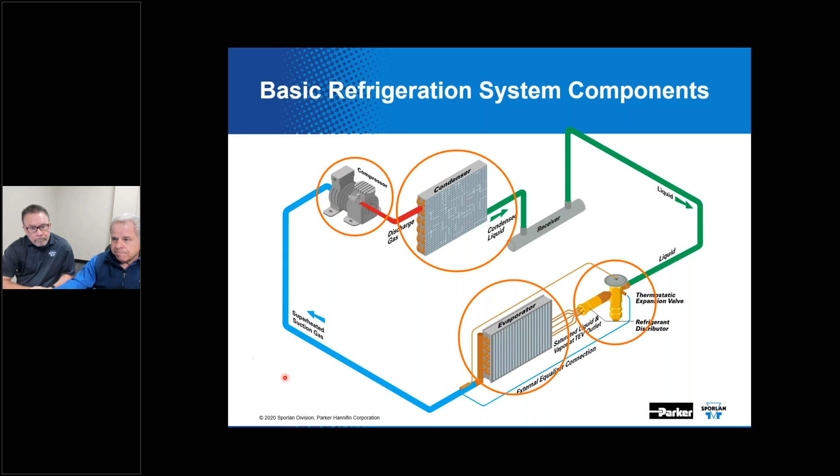And then, of course, here we have the evaporator as that 4th component I was talking about, where we are absorbing heat, transferring heat from a space that we're trying to cool or refrigerate. 4 main components. Now, here's a more complicated image.

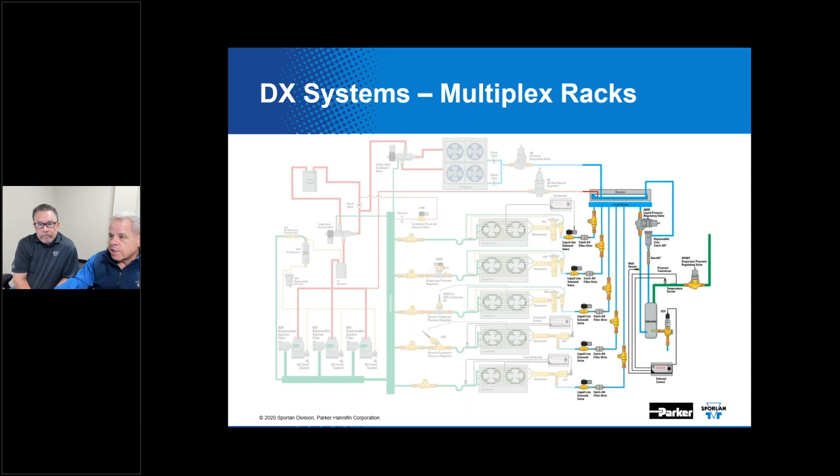Even with all that, this particular image is quite reduced from what you might encounter in an actual supermarket environment. But today, we're mostly going to talk about, or at least we're going to start conversation here on the high side with the liquid side components. If down the road, Don asked us back, there are other devices that we can emphasize with some of these same techniques. We can talk about mechanical subcoolers, we can talk about liquid pressure regulators and solenoid valves on the liquid line applications, as well as filter-driers.

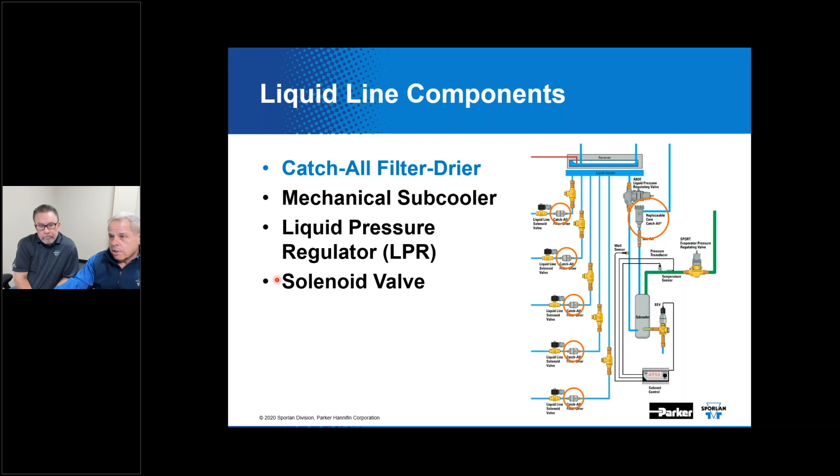Oh yes, many times. Now, our filter-drier is purpose-built, or any good filter-drier is purpose-built to remove contamination from the refrigeration system and protect system components. Anything in a system besides refrigerant and lubricant, sometimes referred to as oil, is considered a contaminant. The Catch-All filter-drier is designed to remove these major contaminants, which consist of moisture, acid, sludge, varnish, and even waxy substances as well.

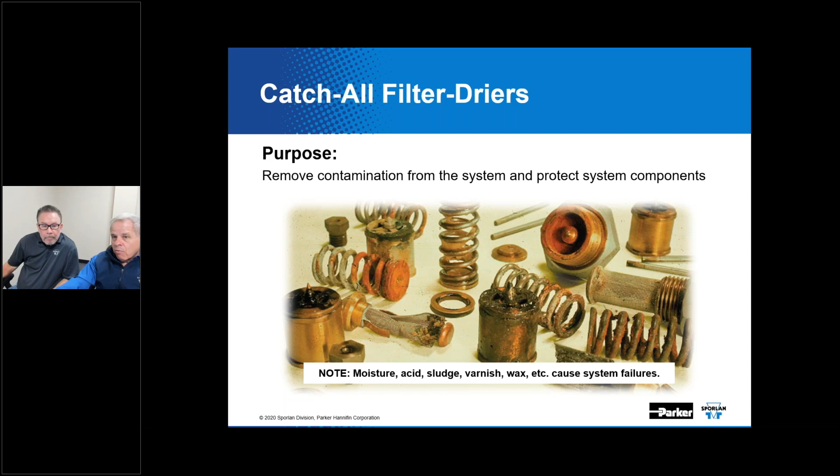As you can see on this slide, we're talking about material you don't want in the system. Contamination is anything that is any unwanted material in any unwanted location. Contamination is one of the single biggest culprits on compromising the operation of the system with respect to reliability, capacity, and efficiency. It's one of the single biggest things that causes the system to malfunction.

To use some of Don's words that I've heard him say in the past, you want the system to be clean, dry, and tight. We want it to be clean and free of any contamination. We want it to be free of moisture, which is also a contaminant, and we want it to be leak tight, leak free. Contamination can be introduced from a number of things.

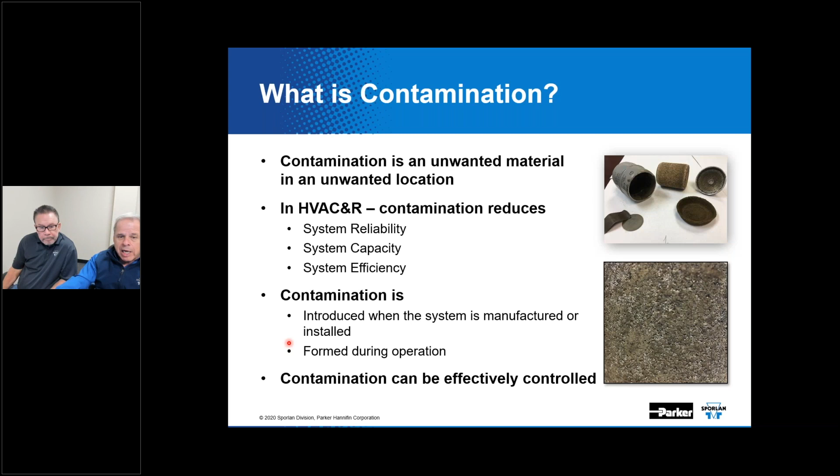For instance, it can be introduced when the system is manufactured, and I don't want to point fingers at anybody, but sometimes that can happen. It can also be introduced while a system is constructed in the field. It can be formed during operation, when things go awry during normal or abnormal operation, contamination can be generated. But there's good news on all of this - there's ways to control it and corral it and alleviate the problems that it can cause.

With the common use of POE lubricants, this is certainly a potential issue due to the hygroscopic nature. It's so water hungry, right, Kevin? It's the POE has an affinity for moisture, so to speak.

Absolutely, Jim. Now, as I recall, and you might know more about this than I do, but alcohols and acids are actually processed to form POE lubricant, and there's a byproduct when that takes place, and it's actually water. So does it make sense that you could reverse that operation? If you had POE lubricant circulating through the system and you had an unreasonable amount of moisture entrapped, you could revert back to alcohols and acids being present in the system. Does that make sense? That would be absolutely correct, Jim.

Now, foreign matter originates from a variety of sources, like we said earlier: oxide, scale, metallic fines, fibers, and the list just goes on. This stuff can be introduced into the system during assembly, during construction, or service. Keep in mind, some of these lubricants, like POE, do a really good job of suspending and transporting large amounts of debris if it's in the system.

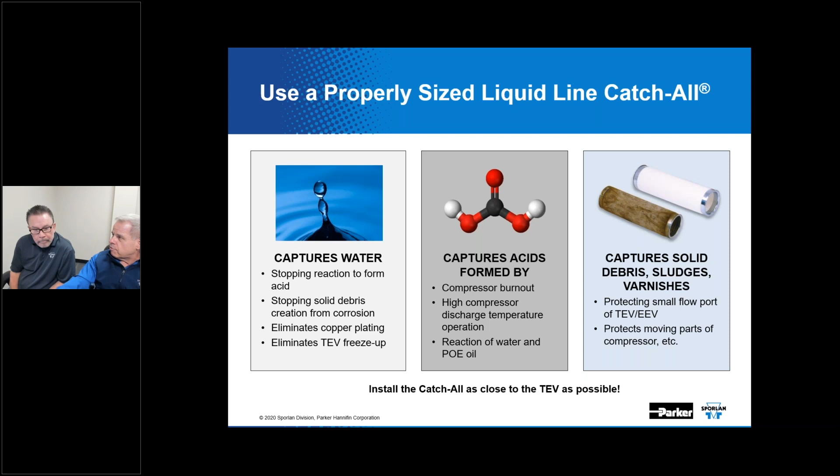POE is also a reasonably good solvent and has a scouring action, and if there is stuff that's plated out, it could possibly break that loose. Then you might have sludge and varnish as byproducts of lubricant decomposition along the way. Even waxy substances can originate if you've got a low temp system. We still see that on occasion, maybe not as often as what you used to have in the era of CFC refrigerants, but still does take place, if I'm not mistaken.

Before I go on here, Don originally said we had a question or two. One question is, what is the temperature at which the paint on a filter dryer will melt or burn? Okay, that's an interesting question. I can guarantee this: if you put a torch to it out in the field, you're going to burn it and deteriorate it. That's a tough one.

That usually comes up because you've got a filter dryer that is being sweat into the system. Oftentimes, a lot of times people will want to install that out at the condensing unit, right? That's where you see them a lot of times, Kevin. We'd rather see that filter dryer right there at the inlet of the evaporator where the expansion device is located, so that you got good protection for it there.

I don't know the exact point at which that epoxy powder coat starts to deteriorate due to heat, but I know it is certainly compromised by the heat from a flame on a torch. So maybe all the more reason to be mindful of that when you're brazing it into the system.

We've always recommended that you definitely direct your torch flame away from the shell itself, and it's always a good idea to have it wet-ragged or have some kind of thermal protection to prevent burning that paint. That's a good question.

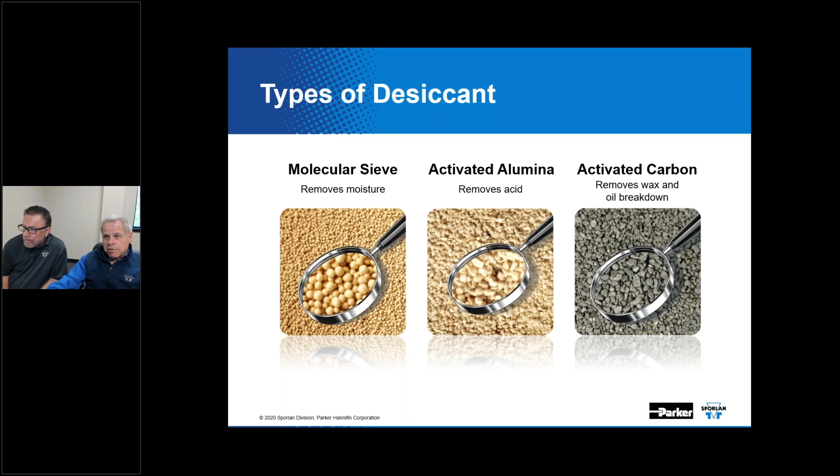Since it's kind of tough to ever predict what kind of contamination might actually be in the system, and depending upon what type of operational issues you've encountered, a molded core with a blend of these desiccants would be an interesting way to approach solving that problem.

Well good. The adsorption of moisture by molecular sieve is actually a molecular phenomenon, and it does not affect the flow capacity through the core around the molecular sieve granules.

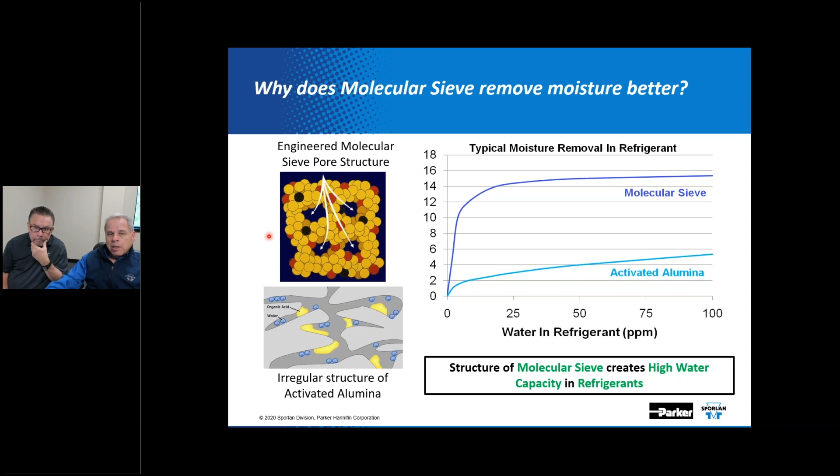Now, if you're pulling a vacuum on an existing system that's been wet, and you suspect the molecular sieve in the filter dryer has done its job, that makes the argument for you to do as good as you can at that point. But we've got a list of reasons why you would replace the filter dryer. Anytime you've gone into a system and done any kind of service, we suggest you replace and renew that filter dryer. I know that's sort of a left-handed answer to the question.

But let's take a look at some more stuff with respect to this. Now, if you consider excessive amounts of moisture in the system, like if you've got a chiller barrel that's ruptured and you have a system full of water, you might see water in the range of getting close to 100%. You've flooded the system with actual liquid water.

From the molecular aspect of how molecular sieve functions, if it traps contamination, you've got to go through a lot of processes to drive that out of the core itself. And I'm thinking the better way to look at that: if you have reason to believe you still have acids in the system, still have moisture in the system, and you've done all the things you know to do, it's time to renew the filter dryer's capabilities and replace it, then continue on with the process you're doing to try to clean it up.

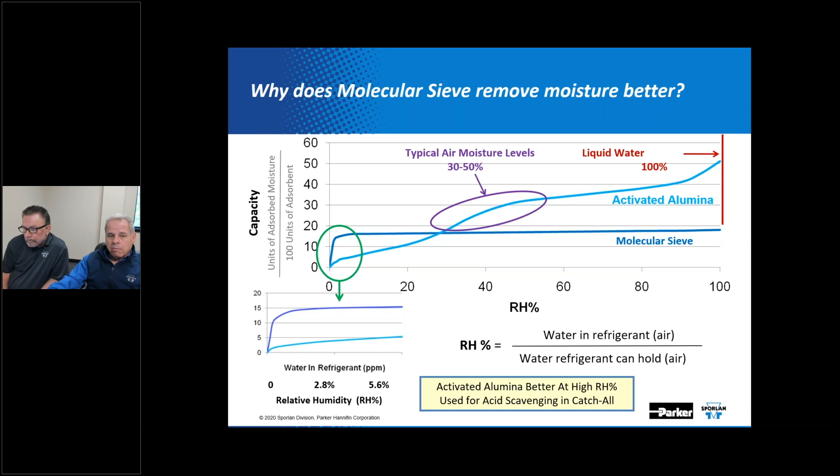Now, filter dryer construction varies by manufacturer and even within the product lines of any given manufacturer. In fact, Sporlan has made solid core filter dryers for years. We've also made loose filled or compacted bead dryers as well. Over time, there's always been a thought that a loose filled version can experience some desiccant attrition. In other words, these beads could vibrate and abrade one another, and due to that process, you might actually have small particles of the desiccant released into the system. That's certainly always been a concern with filter dryers of this design.

The argument can go the other way too. They can say, well, if you've got a molded core and it's abused or roughed up, it could break, and then you've compromised the abilities of that as well. And that certainly is a possibility.

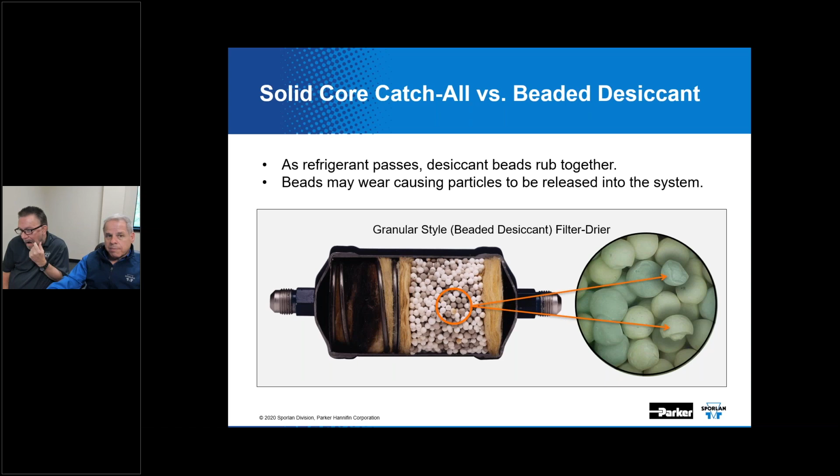We've offered a low-cost, spring-loaded, granular-style filter dryer in the past that was loose-filled or a compacted bead. We've started phasing that out of the process, right, Kevin? Is that no longer in the lineup currently? Correct, yes. And where were those typically used, Kevin? Those were sold mostly for? Primarily OEMs. It was a lower cost option. For like R22 air conditioning, for instance, that sort of thing? Correct, yes.

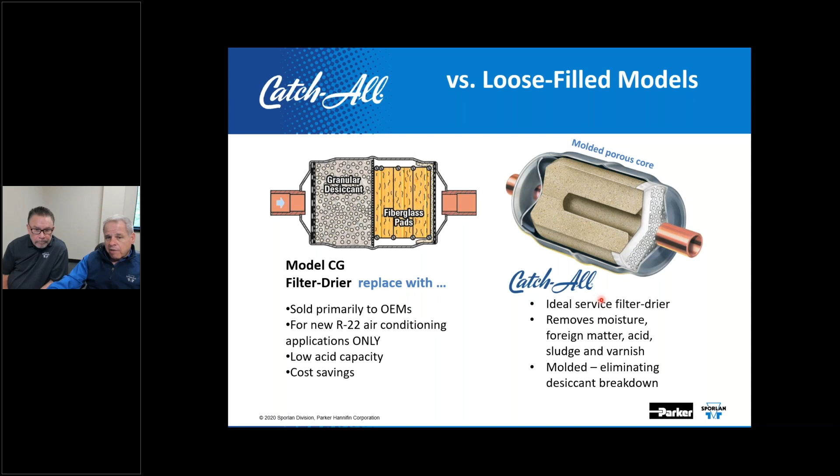But it was mostly a low acid capacity, primarily targeting moisture affinity and tending to entrap moisture. Due to that low acid capacity, we would have never suggested this for servicing equipment in the field. We would have said a better way to approach that would be with a blended solid core like you'd see in a catch-all, which would target the many contaminants that exist in a refrigeration system, and we could eliminate the possibility of any desiccant breakdown or attrition in the process.

This optional secondary filter is a good addition to the system in conjunction with things like POE lubricants. POE lubricant can exhibit a little bit of a scouring tendency, so if it's an existing system that's been retrofitted, you can experience times where that might actually break some of the plated contamination that's been existing in the system for a long time. The secondary filter really helps to clean up afterwards.

Like the sealed models, the replaceable core catch-all can filter down to 40 microns, and the addition of this optional secondary filter can take that all the way down to 20 microns. So it's as effective as most any other device you're going to encounter.

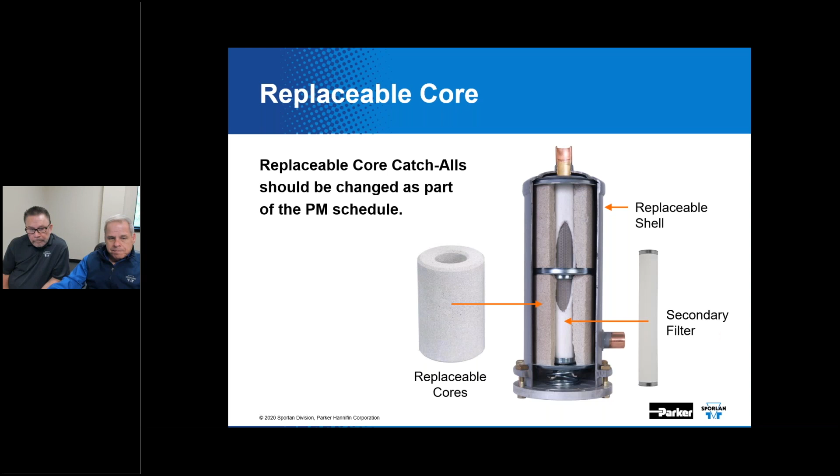The replaceable core type catch-all filter dryer had been manufactured with some different internal components over the years. In the late 90s, it was significantly redesigned, and the internal assemblies of our size C-480 through the C-1920 series shells incorporate a center strainer screen tube construction as the final filter, as you see right here.

The current shell is designed to be used in liquid line applications with replaceable molded cores. An optional secondary filter is still available, and it's recommended at startup and for cleanup in the aid of filtering out undesirable small solid contaminants. You have to be careful when you use that with molded cores only.

The replaceable core type catch-all filter dryer provides a nominal filtration ability down to that 40 micron size at a decent efficiency, I think it's like 50%. When you add that optional secondary filter, of course, we can filter down to 20 microns.

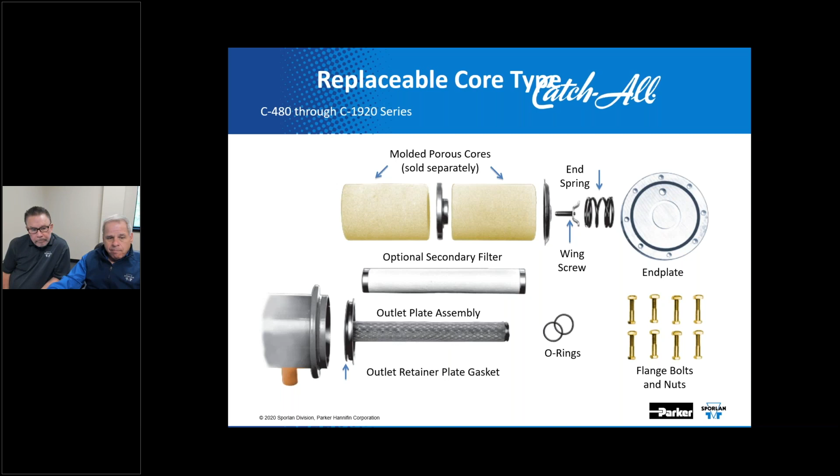Now, as we move into considerations for cleanup outside of the high side, which a lot of these products are intended primarily for liquid line applications or high side application, I guess the general consideration is that you do your best job of collecting moisture out of the system at higher temperatures from liquid. And that's been part of the argument for using liquid line filter dryers for years.

But for certain cleanup applications, it makes sense to have suction devices being addressed as well. We've got a number of replaceable shell catch-alls. While they're primarily intended for liquid line applications, those with the center tube construction are designated appropriately, and that center tube construction allows easy installation of cores and the availability to use that optional fine filter.

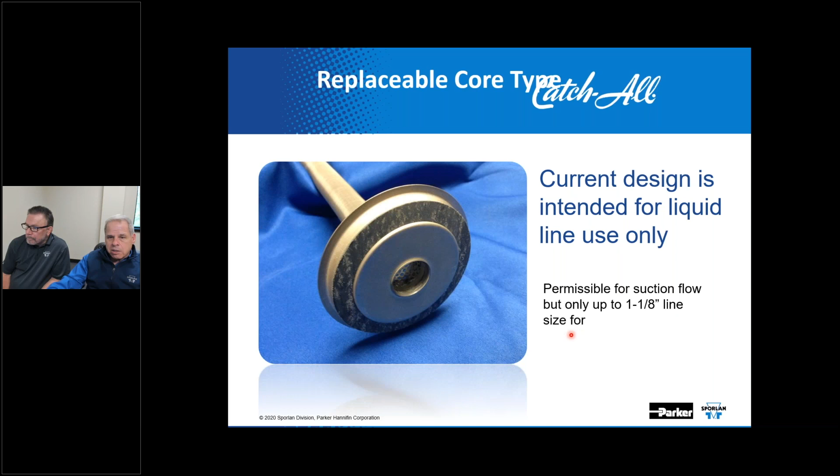And you've got an outlet retainer plate design, which would be possibly too restrictive for suction flow applications, but you could use it there as long as the line sizes are of the appropriate size. As it says here, permissible for suction flow, but only up to 1-1/8 line size. That's something to keep in mind.

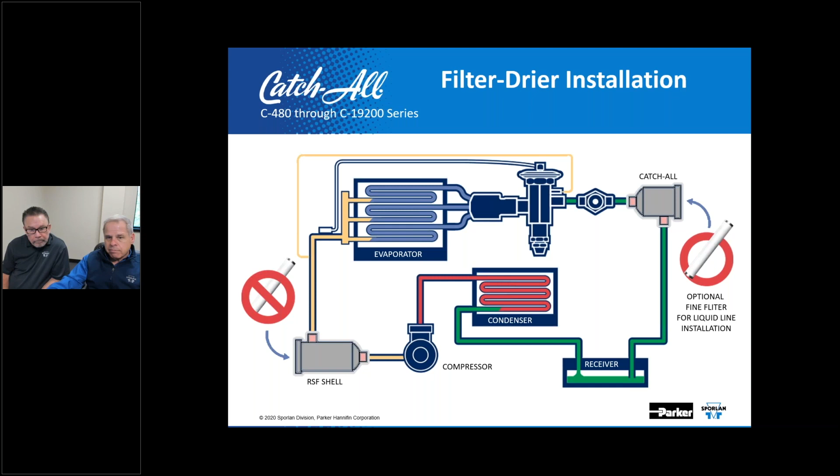Now, this is again more emphasis for that clean, dry, and tight mantra that Don's promoted in the past. We do cleanup of large systems well to ensure that we protect things like thermostatic expansion valves and electronically actuated valves.

The TEV and the EEV are excellent secondary filters, strainers if you will. If you have a debris-laden system, they're going to help you clean it up. But then what's going to happen is you're going to have devices that are full of junk and debris, and you're going to have to replace those. That secondary filter can capture small particles that the core can't, and cleanup is complete when you have that clean, dry, and tight condition achieved.

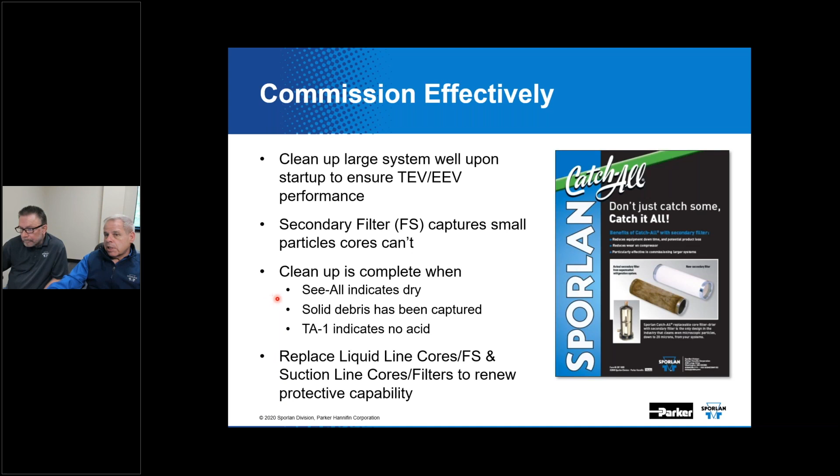You see a number of different images here for our contamination devices and some coloration differences. That ultimately comes from the clay and other elements that are actually present in the materials that are mined to create these different styles of cores.

A good practice would be, if you're cleaning up after burnout, to have a suction line device with the HH core, and then of course our RCA in the liquid line side.

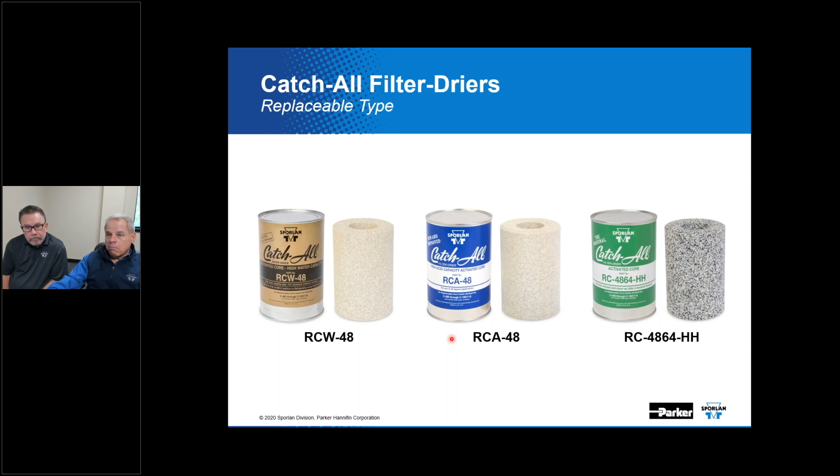Waxy substances can also plague low temp R22 systems. Here's an argument that shows a thermostatic expansion valve, which we have depicted here, can actually help filter out some of this debris in the system, which is not what you want to have happen. Wax can fall out of solution at the pin and port during expansion, where there is a great big pressure drop and a huge change in temperature, which can help precipitate debris that might be in the system.

Waxy substances can travel in solution with refrigerant and oil, and wax is generally not realized until the refrigerant experiences a big pressure drop during the expansion process, causing the substance to precipitate out of solution and collect at the pin and the port.

Kevin, what would be a possible source for that wax in the first place? How does wax get in the system? The source of wax could be residual process fluids such as paste flux, drawing oil, remnants from the manufacturing process, and the deterioration of the lubricant used in the system.

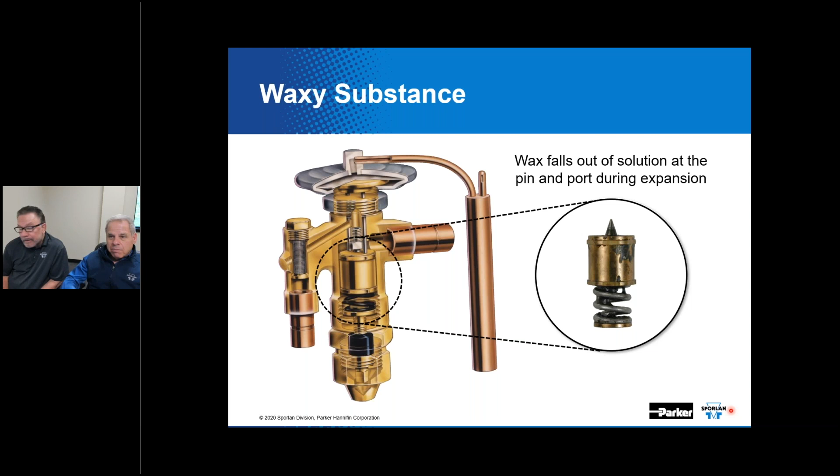Mineral oil contains some amount of paraffin wax, and we still see some mineral oil in systems, right? That's not going away just yet altogether. Not completely, yes, it's still there, so you count on the TEV to be the best secondary strainer in the system, and it will collect contaminants if you don't do something else about it. All the more reason to take good measures to clean up the system.

Systems that run high condensing pressures and temperatures are likely to generate oil breakdown. What do we mean by oil breakdown? Well, the higher temperatures cause the lubricant to fail, basically. It no longer has the lubricant properties, and it can cause problems. Oil breakdown tends to collect at the TEV on the pin and the port and affect the operation of the valve.

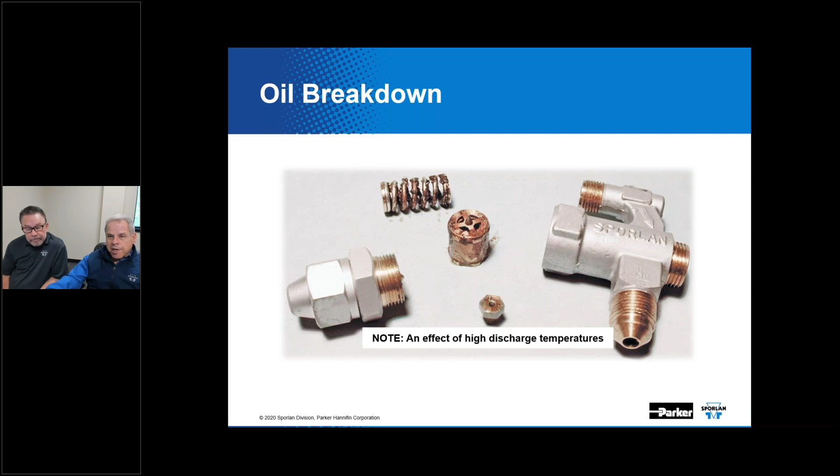I think there's a ten dollar word for that, that some of our product managers in the past would call polymerization.

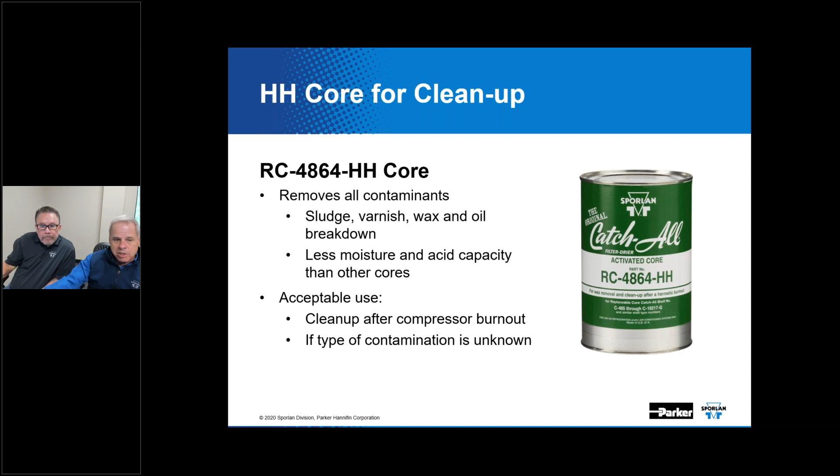One of the things we mentioned before is the presence of acid in the system, and it's, well, how do you know if you have acid or not? One way to take a look at that is if you can access an oil sample. We have acid test kits available to do an on-the-spot quantitative test.

When the acid level is high, you really need to address that. Good recommended practice is to change that filter dryer and monitor the acid level until it gets to an acceptable or non-existent level. You'll need to replace that filter dryer to replenish the contaminant holding capacity.

We'll sometimes receive complaints about a filter dryer having excessive pressure drop across it after it's been installed in a system. What would excessive pressure drop across a filter dryer indicate to you, Kevin? That it's working—it's actually collecting contaminants that are in the system, and that's what you want it to do if they're present. It's done its job.

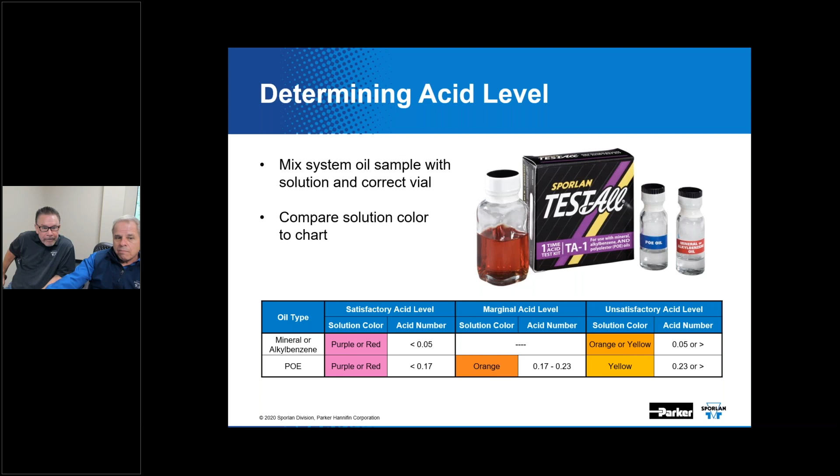Green indicates a dry environment. As it changes color to chartreuse, you can see we're at a cautionary level. If it goes to full yellow, well, then it's wet. It's reversible, provided it doesn't get drenched with moisture—it'll go back to green in time. If it remains yellow, it's probably time to do some service on that system and replace the filter dryer.

Prior to installation, if you pull one of these out of the box at a wholesaler, it's likely to exhibit a chartreuse or even a yellow color, depending on the humidity level in the building—that's just due to exposure. Once it's installed in the system and a deep vacuum is pulled, the moisture indicator should change back to green, unless there's still water or moisture in the system. It will change color to indicate system moisture level once the system has had some good runtime and things have reached a good steady state.

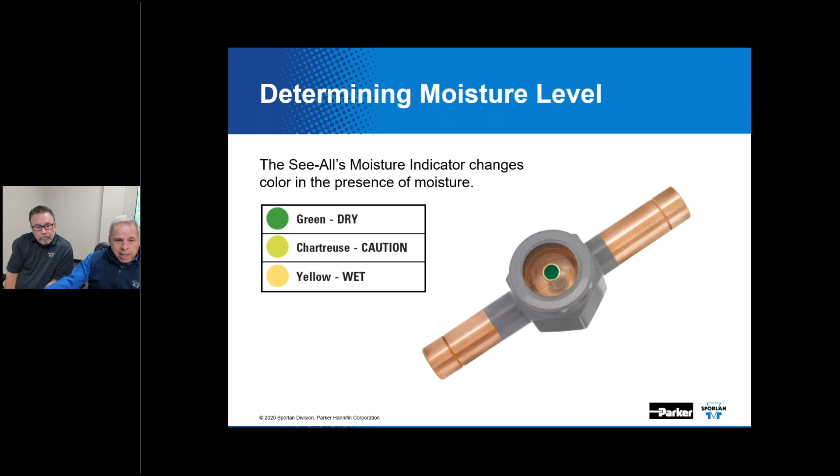Another feature of this device is its ability to give you a snapshot as a sight glass. For instance, if it's placed here, at the inlet of a thermostatic expansion valve, you can see if there's a full column of liquid entering that device.

So it serves those purposes, and in many ways it's a very simple device to select. It's a line-size type of device, and it's usually just a matter of matching up to the line size and selecting what type of fitting combination you'd like, be it flare or sweat. There are many combinations of this, a whole host and plethora of versions, like we see here. Kevin, what's special about what we see here?

It's serviceable. Correct—you've got the indicator that, if you needed to remove it from the bottom side of the sight glass, you can do that, and we do sell that. We sell a kit for that, to rebuild it. Yes, we do offer a kit for that.

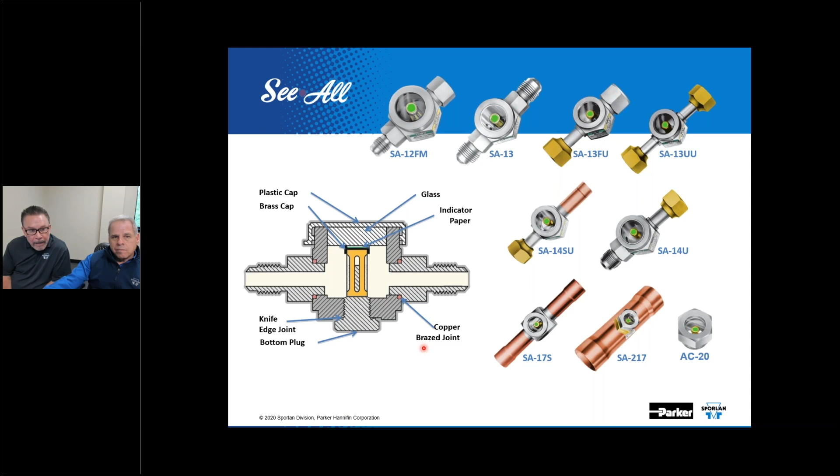Whether it's a problem where the salts have been washed out, or in this case you wouldn't with flare connections, but sometimes on the ODF solder sweat ones, we see them get burnt during installation. And in fact, going back here...

Green, it's dry; chartreuse, it's cautionary; yellow, it's wet. If it happens to be brown, it might be contaminated with debris. If it's black, it's likely been overheated. If it's showing no color at all, there's probably enough moisture in the system that it's washed the salts off this paper—and that can happen. Yes, it'll wash it out to basically appear totally white.

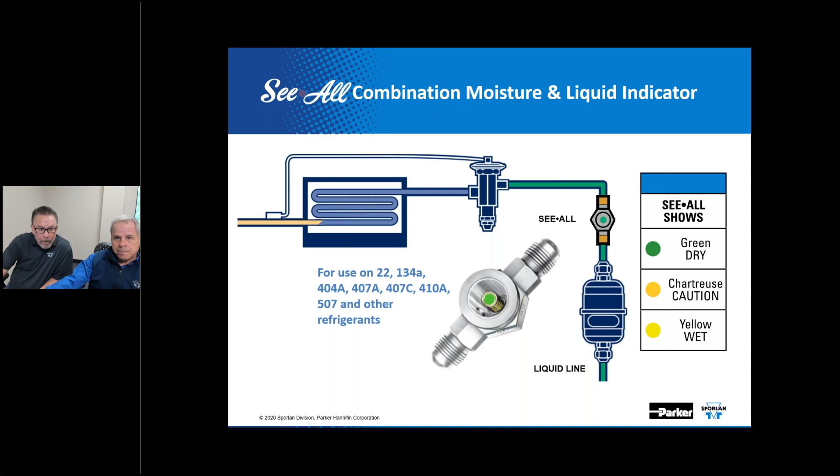As is the case for catch-alls in general, we also make suction filters in sealed and replaceable element models. As its name implies, you'd use a suction filter and install it in the suction line, and it would be for filtering operation only. It's a good device to help protect the compressor.

These have no moisture or acid removing capability and serve only to protect the moving parts in the compressor from fine pieces of dirt, chips, filings, and other particulate contaminants.

A number of the sealed models are furnished as standard with something known as a bypass relief feature. Kevin, what's the purpose of that bypass relief feature? The purpose is to avoid excessive pressure drop in the suction line. This would occur if the filter collected enough dirt to restrict the flow sufficiently. Excessive suction line pressure drop could potentially damage the compressor.

That's an important feature, as it offers protection to the compressor from operating with insufficient cooling at unusually low pressures. That suction filter won't release dirt that it's collected when operating back, if it's in bypass mode. Now there are some people who say, well, you're not doing any filtering if you're in bypass mode, and you've got a point there. You've got to decide what makes more sense for the system you've designed. You want that bypass feature involved—even with the flow directions the refrigerant has to undertake, there's some ability for debris to be knocked out due to flow changes, but you don't have the full effect of the filter. Or you shut it, let it plug off altogether.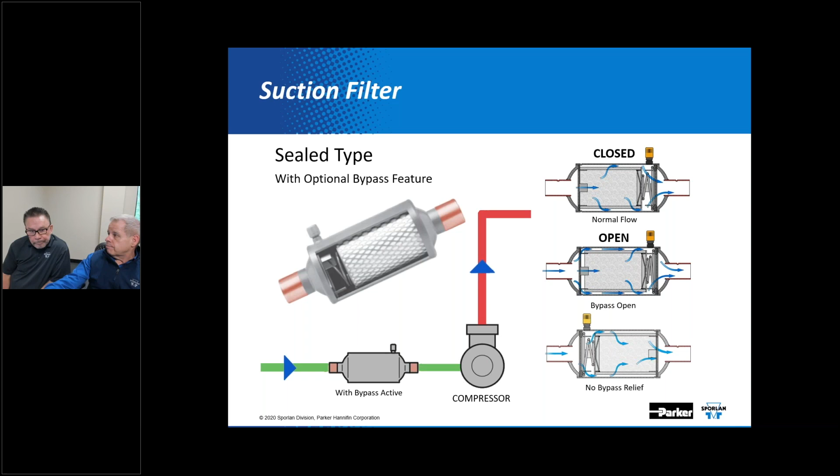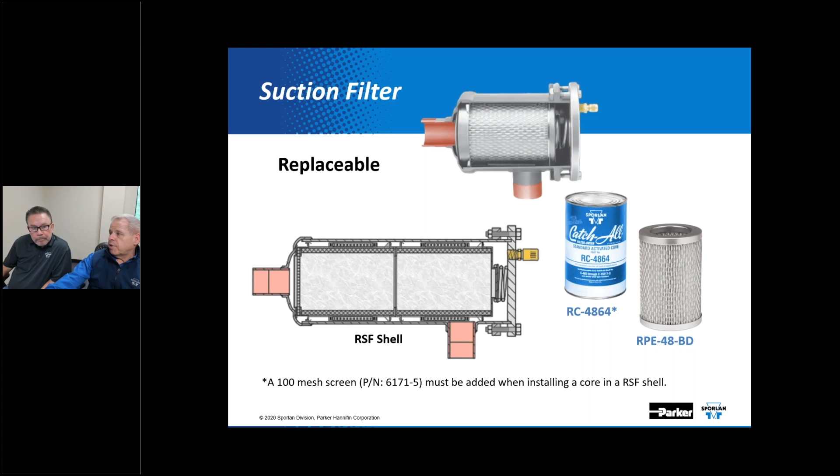The shell for the replaceable element model is nearly identical in construction to the shells of replaceable core catch-alls. The most noticeable difference is the size of the connections for a given shell size. Catch-all cores and pleated filter elements can be used interchangeably, which makes its use really pretty convenient for large system cleanup. After cleanup is completed, using catch-all cores during the cleanup process, the cores could be replaced with pleated filter elements on a permanent basis to reduce suction line pressure drop, because the filter-drier version is going to have a higher pressure drop than just the filter element would have in that similar kind of application.

It should be noted that when using pleated filter elements, the replaceable suction filter is bidirectional, meaning this is a device that can be piped to flow in either direction, but not both. However, if cores are used for cleanup rather than a pleated filter element, the side connection for that shell must be the inlet. It just functions a whole lot better if you take that approach.

When the replaceable element suction filter body is installed using catch-all cores for cleanup, an additional final filter screen should be installed as a precautionary measure. That's one of those things—if you were to install a sealed model catch-all in reverse, you would not have that additional screen in the right spot. I'll have a slide here in a minute that'll show that. Additionally, the pressure drop should be monitored so as to not exceed the value shown in our supplementary bulletin, which you can make out here, depending upon the application.

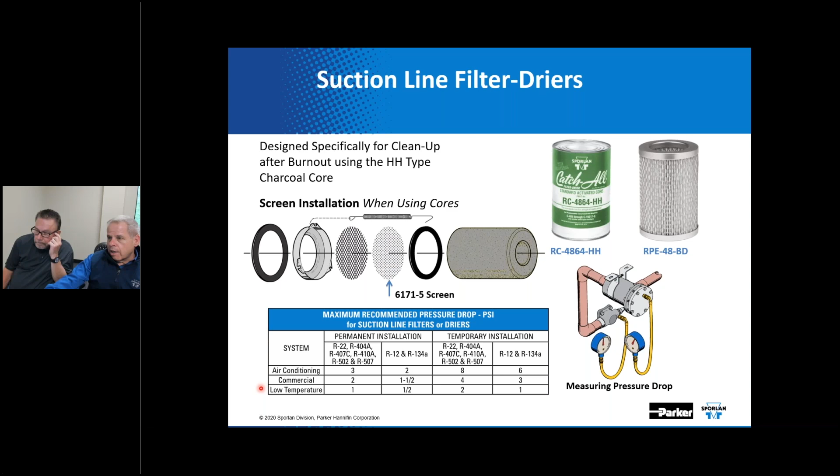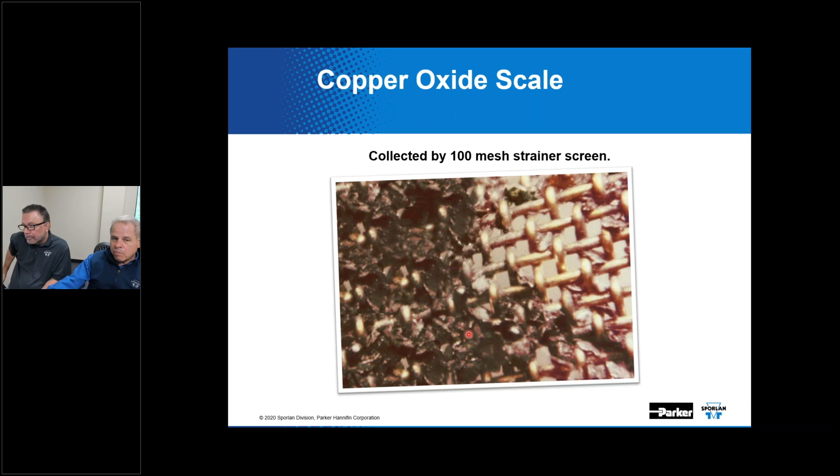In view of these comparisons, it might appear that a filter designed to remove particles the size of 3 microns would be overkill. However, in the case of an oil filter applied to a refrigeration or air conditioning system, the removal of particles in the range of 2 to 20 microns can be an issue when the nature of that particle happens to be abrasive.

That means it'd be a good idea to remove even these small particles that you might actually have trouble seeing. Very small particles of an abrasive material, such as iron filings, when in sufficient quantities, can lead to adverse bearing wear. And how do we know?

Well, let's take a look at this next chart. There was a test done, an evaluation by an engineer known as Macpherson, if I understand correctly. This particular test involved a fairly well-known study that was done on aircraft bearings.

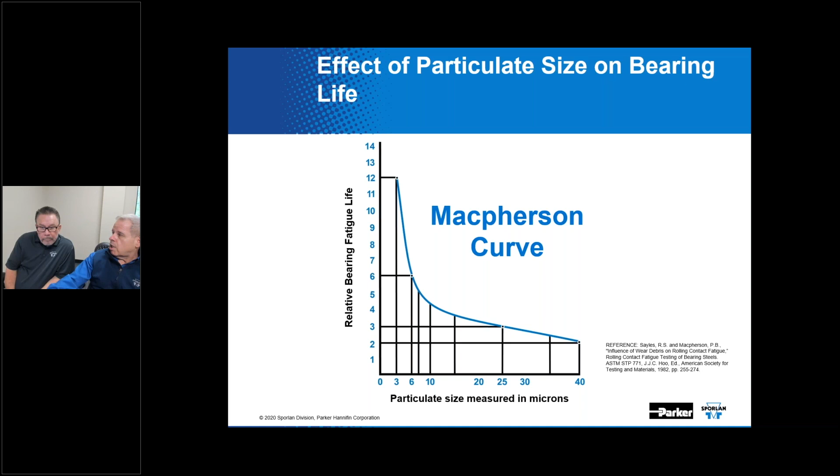This is kind of why you change oil in your car once in a while. Clean refrigerant oil has always been important. However, with the use of HFC refrigerants, which are still on the market, which require a POE lubricant, which again we'll sometimes jokingly call solvent, the importance has become even greater.

Unlike mineral and alkylbenzene, POE has that solvent tendency. POE lubricant has the ability to suspend and recirculate those small contaminants that might remain from system installation or even a retrofit. The analysis of some of these lubricant samples taken from actual systems have shown the oil to suspend and recirculate a high concentration of particles in the 2 to 20 micron size, with the largest percentage being in the 2 to 10 range.

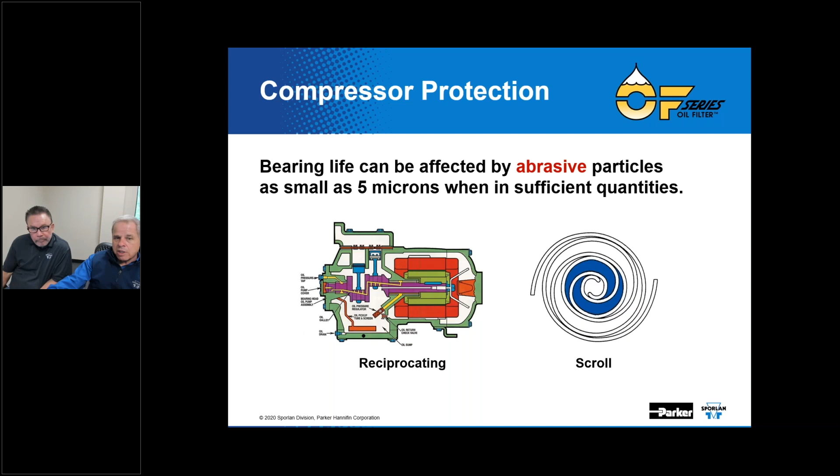Correct. So all the more reason to address this. Although some particles are smaller than bearing tolerances, studies have shown bearing life can still be adversely affected. Bearing wear depends upon the size, hardness, and concentration of these particles in circulation. So now let's take a look at a way to help resolve that.

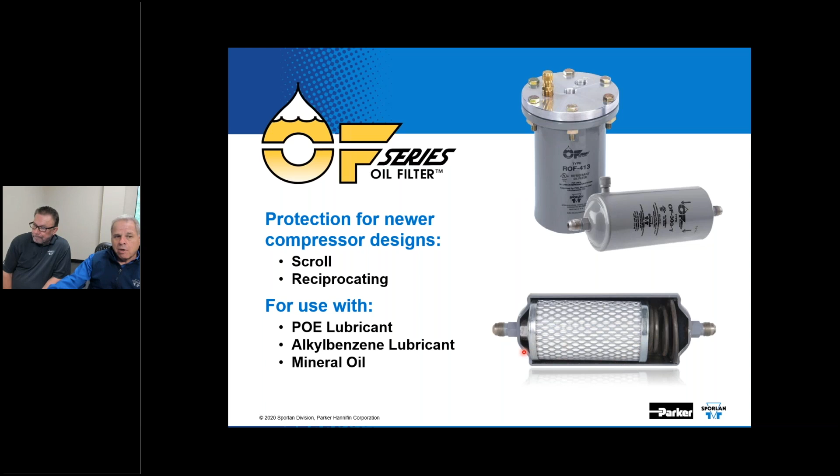Here we've got devices that can be used that will remove those 2 and 3 micron size particles. And we have filters that are built that can be serviceable, like you see here. And we have even hermetically sealed versions as well. Now, this happens to be an oil filter. It's a replaceable filter element. It has the call letters ROF.

It's a replaceable oil filter. The image on the slide shows the flow path of the oil with the inlet fitting located in the end plate, as you can see right up here. It's got a drain fitted to it. This shows the replaceable filter element that you would utilize.

And these particularly work best if they're installed in what kind of arrangement? Vertical. They're more serviceable if you do that.

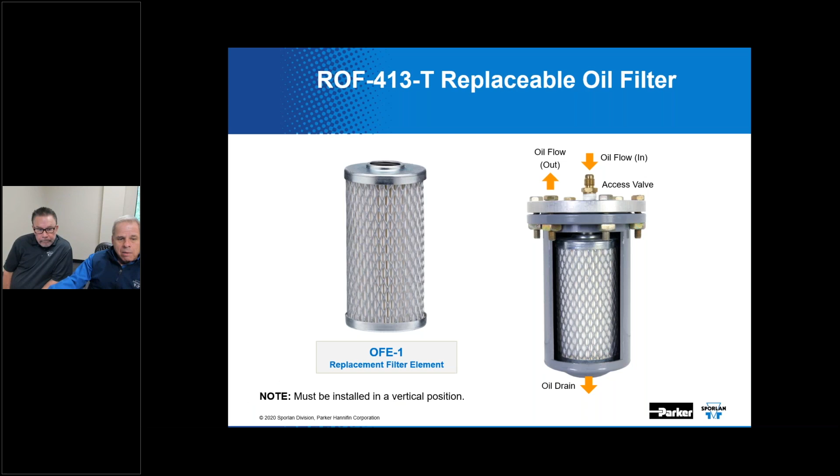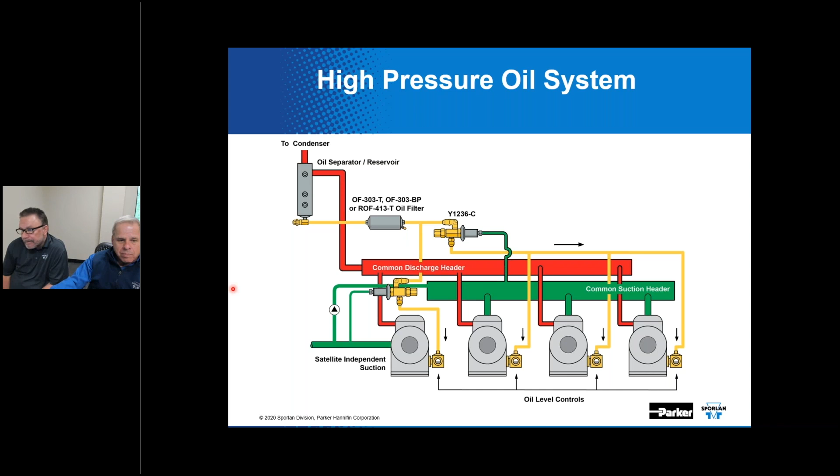Now, the question oftentimes comes up: should oil filters, if you use an oil filter to help protect the compressor, should they be used to remove moisture? And on the surface, it seems like that makes a lot of sense. But let's just review some of these facts.

Refrigerant has been calculated to hold 4 times more moisture versus say POE lubricant. The refrigerant passes through the liquid line filter dryer at a rate 5 times greater than oil passes through an oil line component. Dry down time is quicker in refrigerant versus oil. And if you dry the refrigerant, you will dry the oil because the moisture reaches an equilibrium within the system.

Our contention: use a good filter dryer to remove moisture from the refrigerant in the liquid line. Use a good oil filter to take the particulates out and protect the compressor near the compressor in the oil management system.

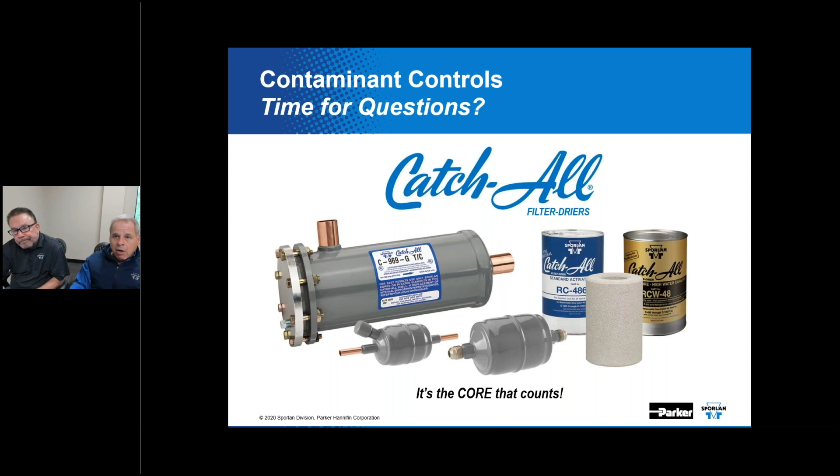And again, if there's any length of time involved at all, just like we said in that earlier slide—in fact, if I may, I'll go back. Your editing expert's going to want to fix what I'm doing to you here.

Now here's one more question—well, there's two questions. This next question is: why can ductless split systems get away with not having a filter dryer at all?

They have decided that in their manufacturing environment, a good enough job can be done to curtail the presence of contamination, be it moisture or other things. In fact, they don't want you brazing or doing any kind of work on them. They're of the contention that they've done a good enough job in manufacturing that they don't want you to run the risk of adding contamination by adding another component to the system. That's the best I understand it. How effective that is, I can't speak to, but I think that's the thought—that's why for the most part they want to use brazeless fittings in the field on these systems. They don't want you taking a torch to them in any way, shape, or form.